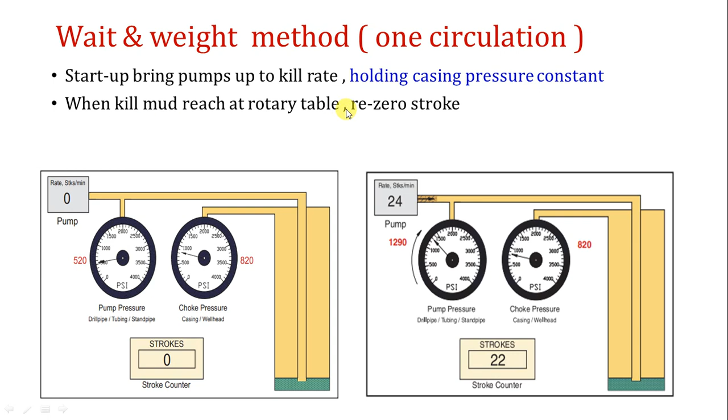When the kill mud reaches the rotary table, you have to make a re-zero stroke. Why? Because if you didn't make a re-zero stroke after the surface lines, you will pump volume - for example the drill pipe volume - but some of the kill mud volume is consumed in the surface lines. So at the bit, you would think the killing mud has reached the bit, while exactly it is not at the bit, it is above it. So that you will not get the accurate FCP, it will be much more than required, which may lead to a problem like fracturing the formation or something like that. So it is very, very important, and that is why when the kill mud reaches the rotary table, you have to make a re-zero stroke.

Now for wait and weight, how will we kill the well? As I told you, in the kill sheet you will see the schedule that we have made, and I told you it will be used in the wait and weight method. The schedule is from ICP until the FCP. It's called the schedule step down, the step down in pressure schedule. This means every 100 strokes, for example, there is 50 psi or something like this, but it has to be calculated from the kill sheet. Keep in mind that this schedule is only used until the kill mud reaches the drill pipe, until the mud reaches the bit of the drill pipe. After this, take this paper and put it in the trash - it has no meaning at this time. So the only use of this schedule is while the kill mud is pumped through the drill pipe until it reaches the bit. But once it reaches the bit, this paper is taken to the nearest trash basket - we will never use it again.

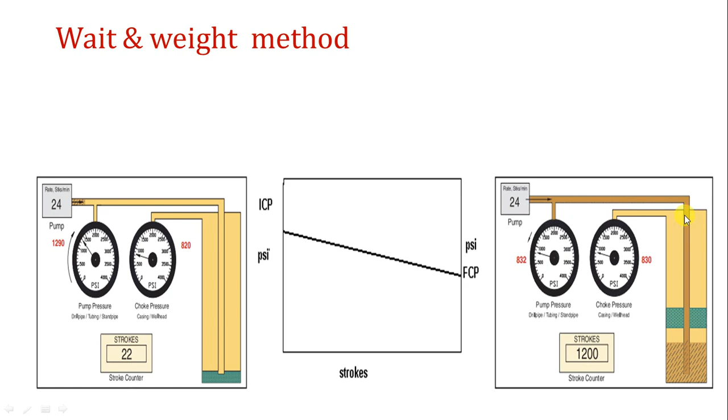Okay, so now let's check. Once up to speed, we reach the kill rate. Here we reach the ICP. Here is the ICP.

The actual ICP here will be reduced as per the schedule that allows the drill pipe pressure to drop from ICP, or initial circulating pressure, to the final circulating pressure as kill mud is pumped to the bit, using the drill pipe step-down pressure schedule.

After this, take this paper and throw it in the nearest trash basket.

As you see, it was here 1290, for example, but here it reaches 832. So this means it makes steps, as you see here, steps.

But what about casing pressure? You don't have any reading about it. Don't care about its reading. It was here 820, here 830 - no problem, but it will increase because of the expansion of the gases here. The gas has been expanded, so it will increase, but don't care about its reading now.

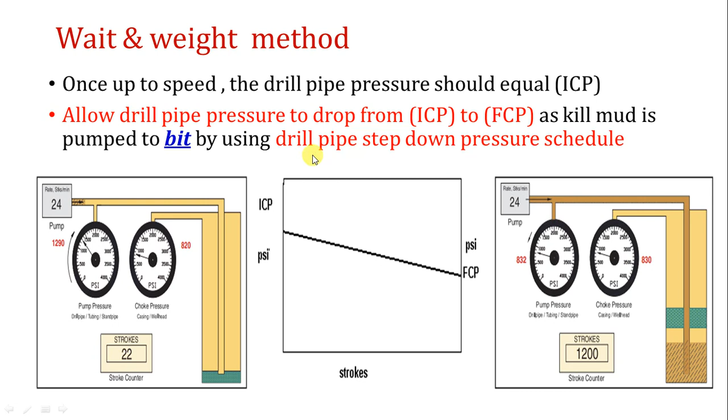Now, after the mud reaches the bit, here there are three phases in the annulus: the old mud, the gas, and the kill mud. But there is one phase of mud, called the kill mud, in the drill pipe.

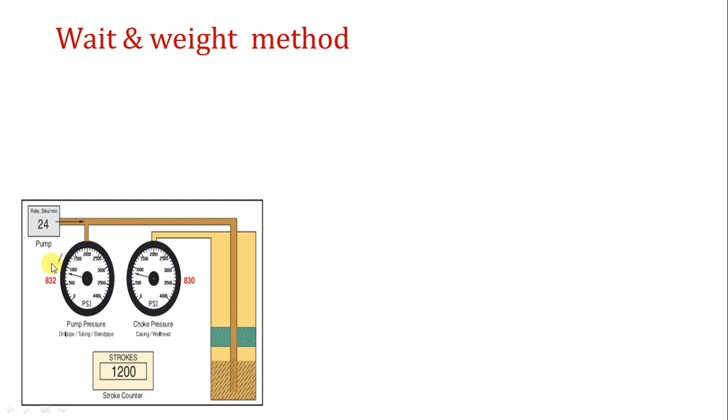So once you reach the FCP and the kill mud reaches the bit, hold the drill pipe pressure to be constant until finishing the killing of the well. Hold the drill pipe pressure to be constant. So with the kill mud at the bit, hold the drill pipe pressure constant, which is at the FCP, until kill mud returns at surface.

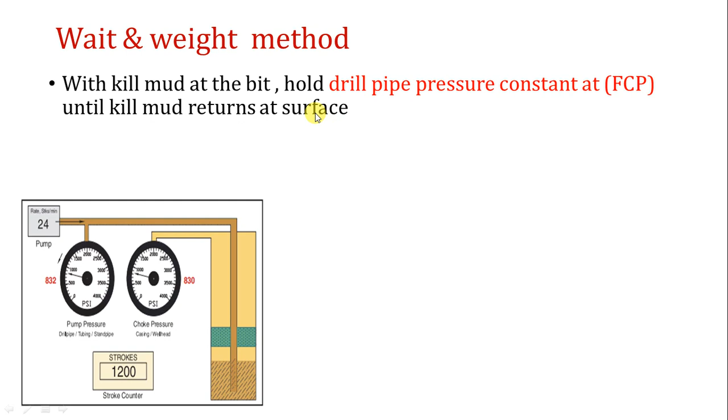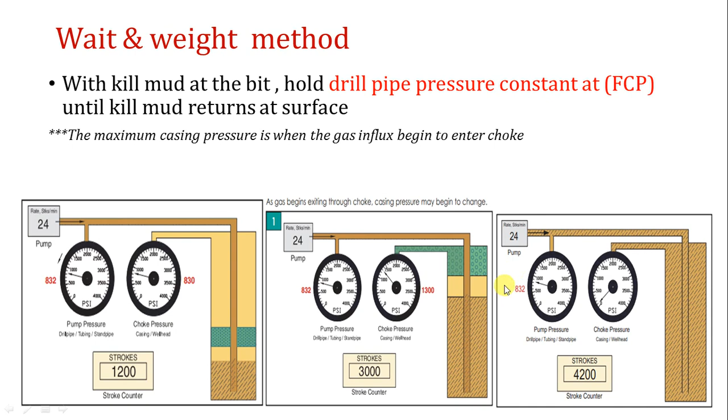Don't pay attention also to the casing pressure. The maximum casing pressure is when the gas influx reaches the surface or enters the choke - it's the same meaning. Keep pumping, holding drill pipe pressure, until all the mud is displaced from the annulus.

Now you can pump extra strokes with the kill mud to be circulated, then shut down the pump. After shutting down the pump, you will see that both gauges are zero.

If, for example, you see a difference from zero, it may be one of two things: maybe you get a second kick, or maybe there is some trapped pressure. If it's trapped pressure, bleed for example 50 psi and check if the pressure increases or not, then bleed another 50 and check again. If it's trapped pressure, it will never increase. But if you get a second kick, it will increase, so you can increase the mud weight and kill the well for the second time.

So keep in mind, now we have killed the well and all pressures here are zero and zero here, so the well is killed.

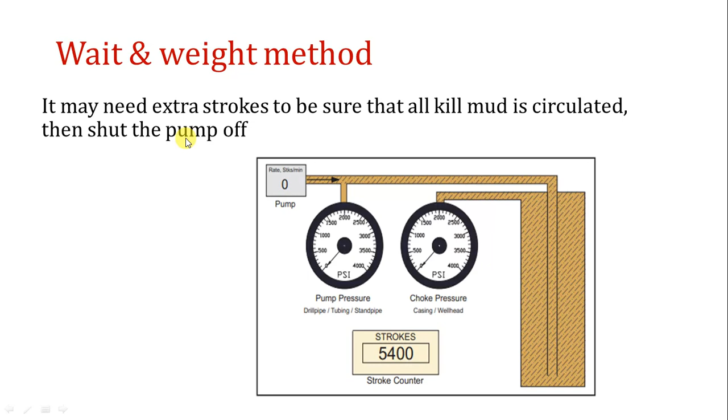Now we will go to some notes, and these notes are very important - all of them are questions in the IWCF and WellSharp exams. It comes up too much in the equations in the IWCF exam: pumping kill mud and gas behavior.

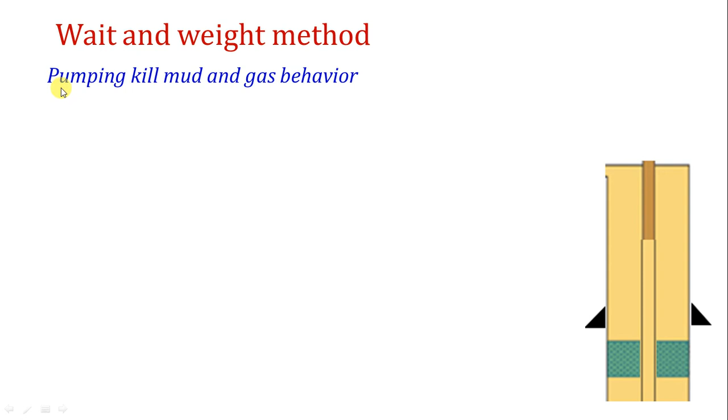The kill fluid fills the drill string while gas is circulating up in the annulus. While pumping, the kill mud is inside the drill pipe, and at the same time the gas is circulating up, but it is in the open hole. So how about the drill pipe pressure, the casing pressure, and the shoe pressure?

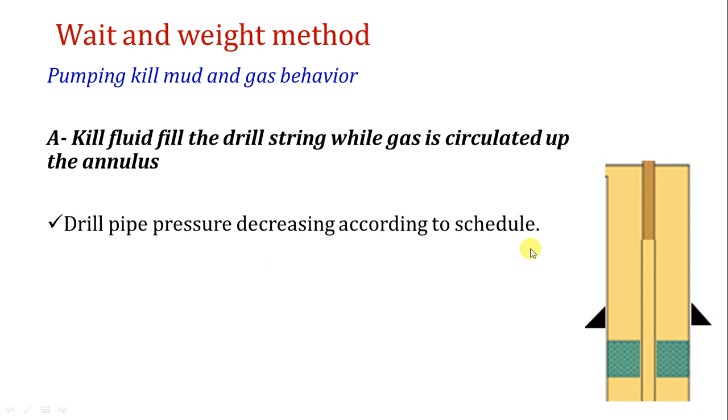As I told you yesterday, we will make a comparison for the three pressures. The drill pipe pressure will decrease according to the schedule from ICP until the FCP. So this is very important.

Number two: what about the casing pressure? Casing pressure will keep increasing due to gas expansion. Number three: what about the shoe? The shoe pressure will be increasing according to the gas expansion, with the same value as the casing pressure, and reaches its maximum value when the top of the gas influx reaches the shoe.

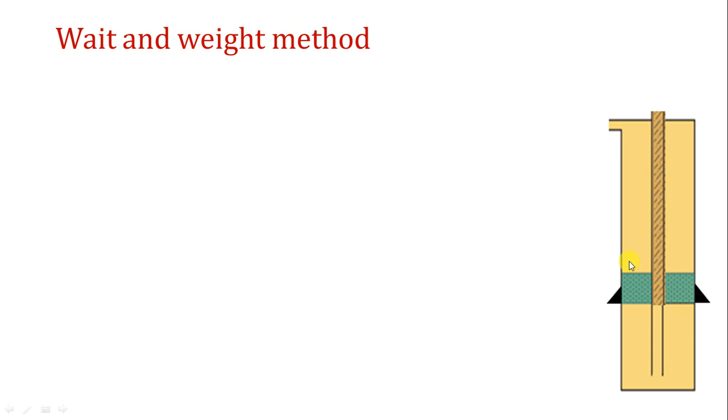Number two: while pumping, the kill mud weight is still in the drill pipe, but the gas has passed or is passing through the shoe. The kill fluid is in the drill string while gas is circulating inside the casing or passing through the shoe.

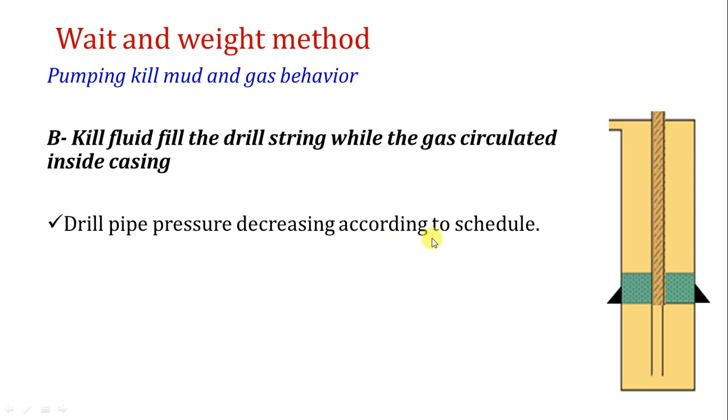What about the drill pipe pressure here? It continues to decrease from initial circulating pressure until final circulating pressure, according to the schedule. What about the casing pressure? The casing pressure will continue to increase, due to the gas expansion.

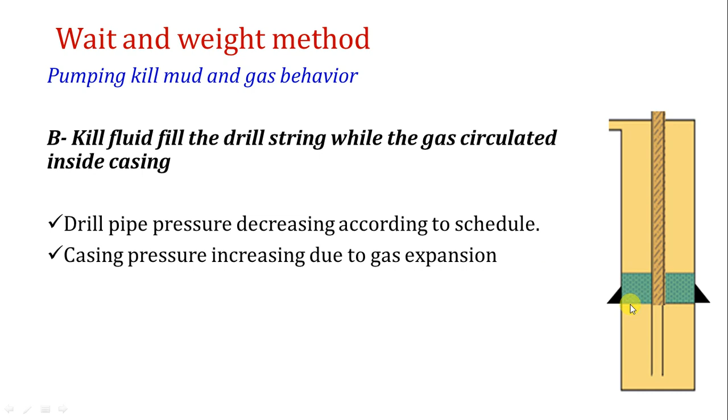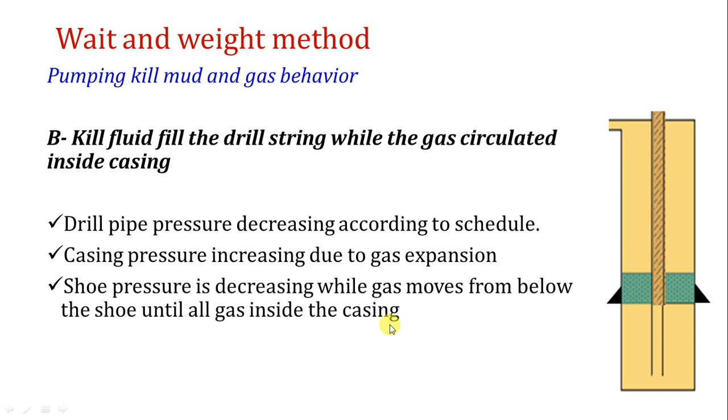What about the shoe here? As the gas is passing through, not passed - we are in present simple tense, not past tense. In the present tense, that means the shoe pressure will become decreasing. So the shoe pressure is decreasing while gas moves from below to the shoe until all gas is inside the casing.

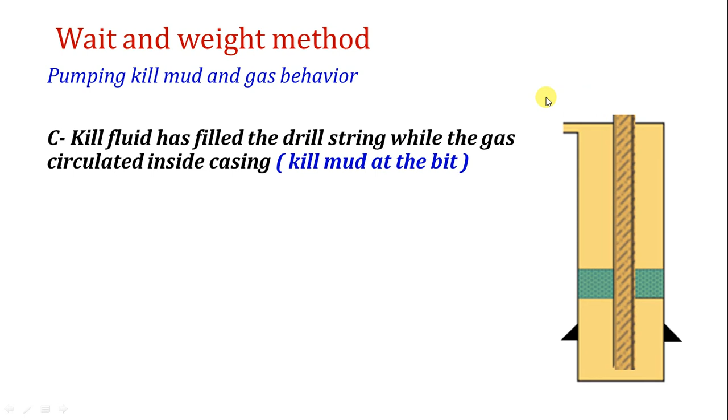Number three: when the kill mud reaches the bit. Here, the kill fluid is filling the drill string and reaches the bit. What about the drill pipe pressure? It has to be kept constant at the final circulating pressure. So the drill pipe pressure is kept constant with the final constant circulating pressure.

So here there is a question: if the kill mud reaches the bit and you keep casing pressure constant, actually the gas is expanding, so the casing pressure is increasing. If you kept it constant, this means you open the choke. This means you will decrease bottom hole pressure and may get a second kick. So the drill pipe pressure is kept constant, and the casing pressure is increasing due to gas expansion.

What about the casing, the shoe pressure here? The shoe here already is one phase around the shoe. Here there is one phase, so it is kept constant also - the shoe pressure remains constant.

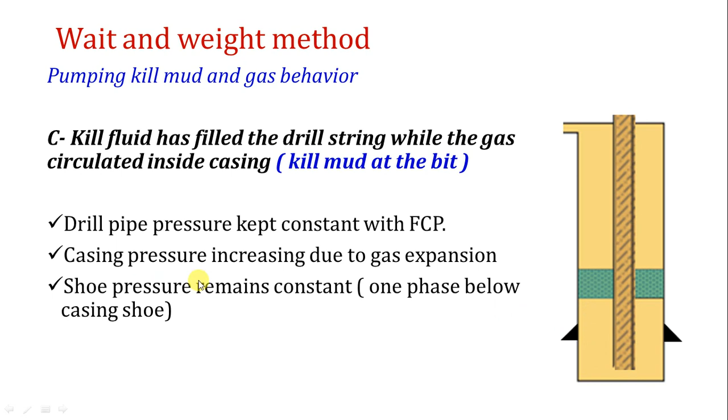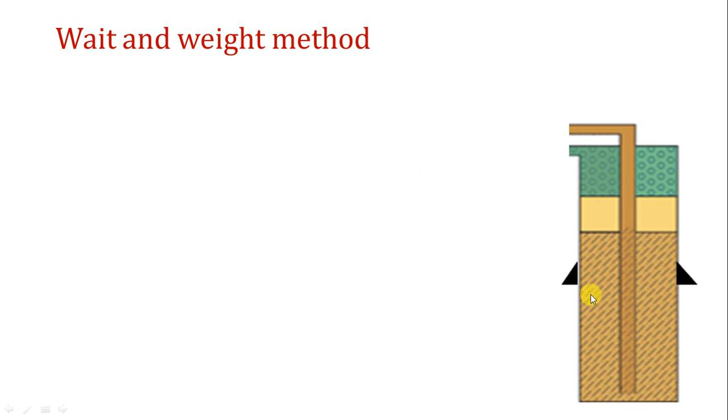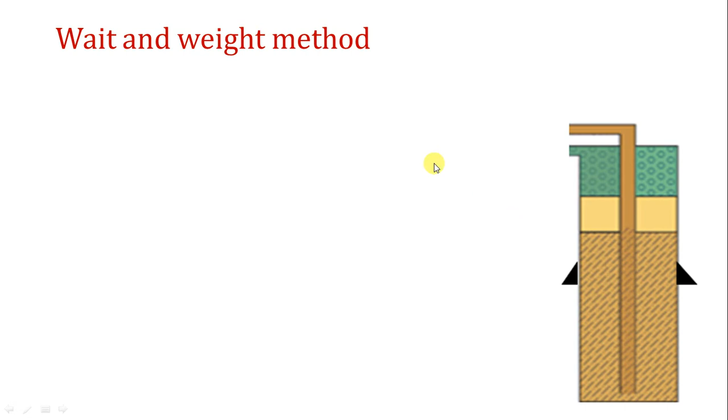What about if the kill mud is pumped through the open hole and reaches and passes the shoe, as you see here - okay, past the shoe. So what about the pump pressure, the drill pipe pressure here? It has to be kept constant with the final FCP. There is no problem about it.

What about the casing pressure? Actually, here there are three phases: kill mud, original mud, and gas. So actually the casing pressure will keep increasing due to gas expansion, but not as before. It will keep increasing, but with little increments. Before, the increase was exponential. So now the casing pressure will keep increasing due to gas expansion, but at a slower rate, because the kill mud is displacing the original mud.

What about the shoe? The shoe here there was a pressure with original mud, with little mud weight, but now there is kill mud with higher mud weight, so it will be decreasing. It will be decreasing as the kill fluid moves up the annulus to the shoe, then remains constant after this. So it will be decreasing until the kill mud passes the shoe, and after this it will be constant.

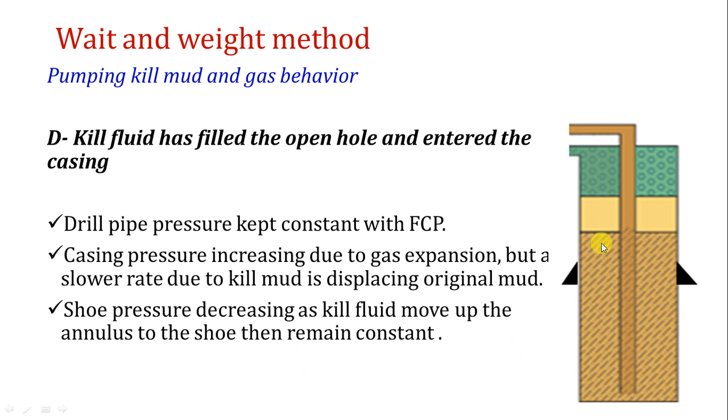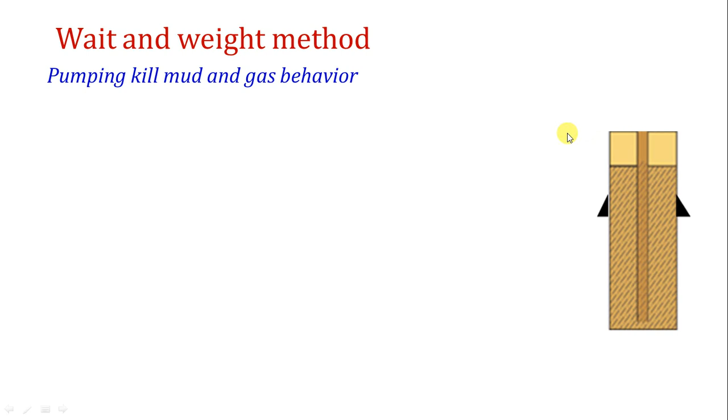Now, after all the gas has been displaced - what if the kill fluid has displaced all gas out of the hole, but there is still original mud here. So the drill pipe pressure is kept constant at FCP. The casing pressure will be decreasing after the gas is displaced out of the hole, and the shoe will be kept constant, remaining at the same value as before, because there is one phase next to the shoe.

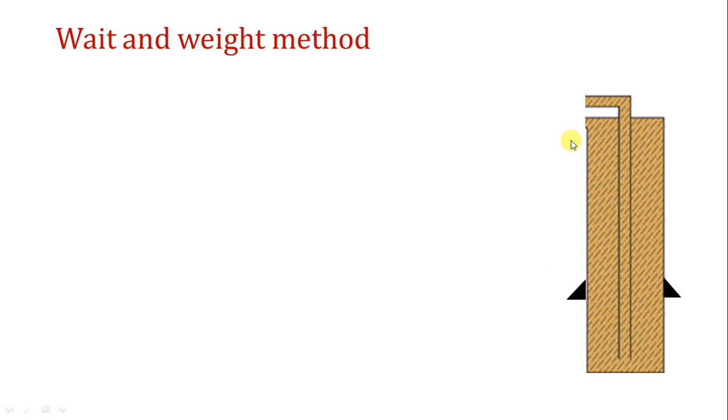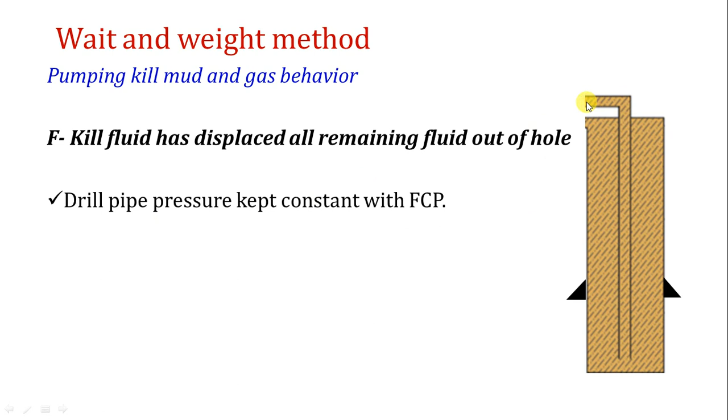Final one: when all the mud is displaced, when all the kill mud is displaced, the kill fluid has displaced all remaining fluid out of the hole. So the drill pipe pressure will be kept constant at FCP. The casing pressure will decrease until it becomes zero, and the shoe pressure will be kept constant with the same value as before.

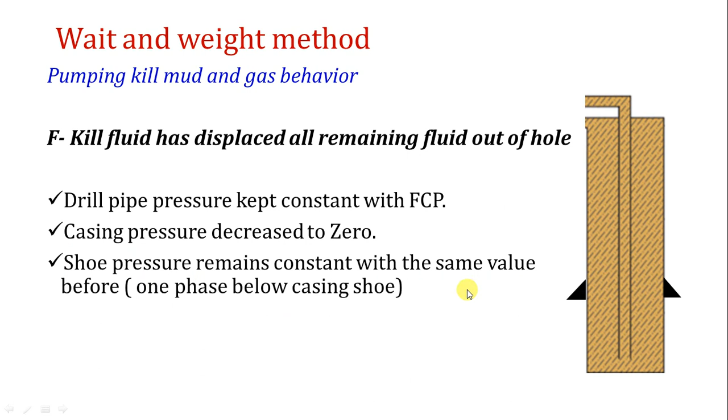All of these notes are very important. Now we will go to some important notes.

Following a choke adjustment, the drill pipe pressure gauge takes longer time to restore due to the length of the drill stem. What is this called? It's called the response time or the lag time - it's 1000 feet traveled each second. This is a very important question I have already asked in the well schematic. So you have to keep in mind it's called response time or lag time.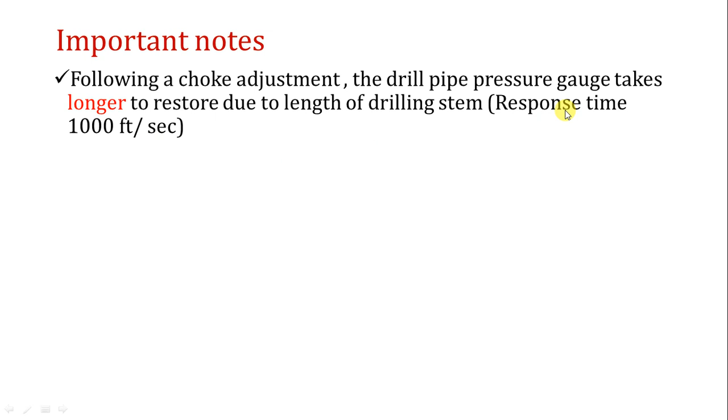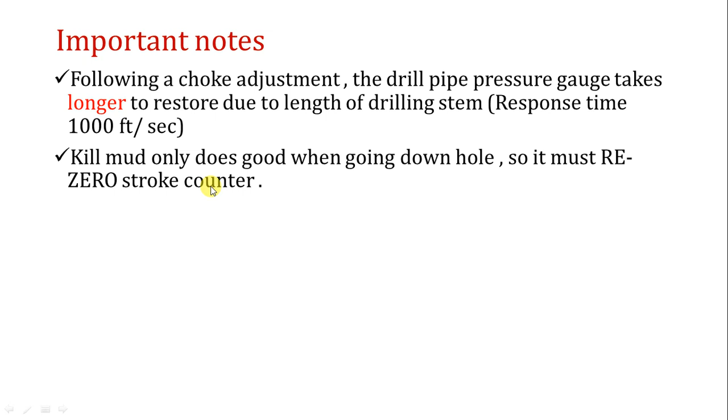Number two: the kill mud only does good when going down the hole, so it must re-zero the stroke counter. As I told you, if you don't zero the stroke counter, you will have a problem because the total drill pipe string doesn't have enough kill mud and the pressure reading will not be accurate.

Calculate initial circulating pressure - it's only a guideline. So there is a very important question.

If the driller came to kill the well and his relief didn't hand over properly, he shut the well to the last reading and has to establish killing the well. What will he do? He will start up the pump, holding casing pressure constant until reaching the kill rate. Once he's at the kill rate, this is the actual ICP. He has to take this actual ICP at the start up, which means when you reach the kill rate. From zero rate to kill rate, hold casing pressure constant. This is a very important note.

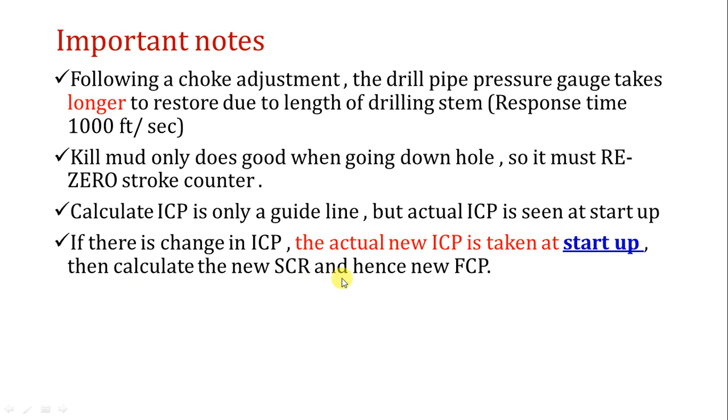If there is a change in the ICP due to anything, for example while killing the well the bit nozzle has washed out or plugged, the pressure will increase. At this time, you have to shut down the pump and shut in the well, and discuss the situation, what happened. After this, you start again killing with the new ICP and new FCP. This is very important: if there is a change in ICP due to any reason, the actual new ICP is taken after start up of the pump, then calculate the new SCR and hence the new FCP. This is also asked in the IWCF exams.

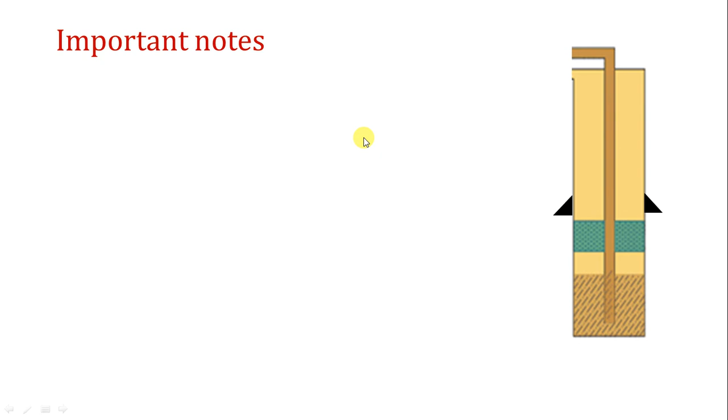If the open hole volume is more than the drill string volume, which method is better to use? If the drill string volume is less than the open hole volume, the wait and weight method is better and will result in lower casing shoe pressure more quickly than the driller method, so it is preferred. This is a very important question: when do we prefer wait and weight over the driller method? When the drill string volume is less than the open hole volume. If the string volume is more than the open hole volume, there is no difference between the two methods.

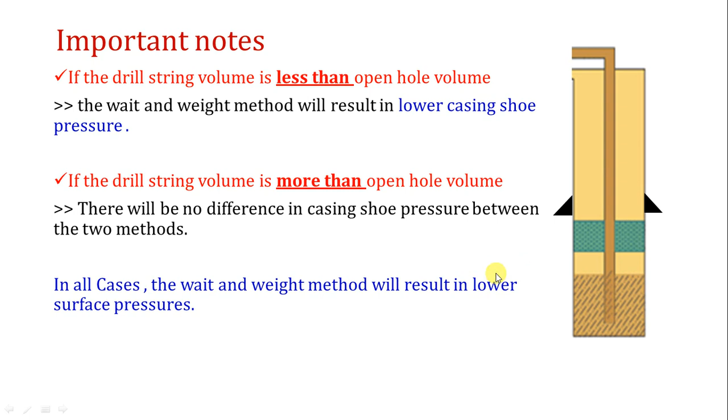In all cases, the wait and weight method will result in lower casing shoe pressure and lower surface pressures than the driller method. Here is a comparison of the killing methods we have talked about before.

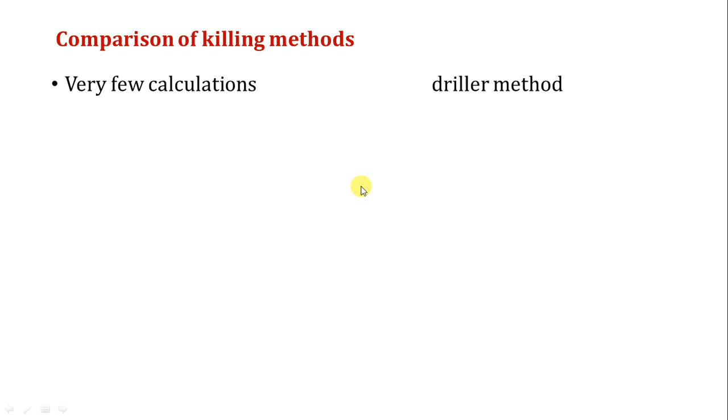If you need something with few calculations, or even if you haven't made calculations yet, you have to use the driller method, because it is just one circulation - circulating with the original mud until you make your calculations and prepare the kill mud. It's the simplest to teach and understand. This is the driller method. It also reduces sticking and gas migration.

There was a question asked in IWCF: if the well has flow and is shut in, but the mud engineer tells you that the barite or weighting agent is not enough on the rig and the truck or boat will come after 3 or 4 days, at this time will you stay until the gas migrates, or is it better to use a particular method? Which method is preferred here? Actually, the driller method is best because you have to displace the influx from the well and keep the shut-in casing pressure equal to the shut-in drill pipe pressure for up to 10 days. There's no problem because there will never be any migration of gases, so there's no risk of fracturing the formation or similar issues. So to reduce sticking and gas migration, you have to use the driller method.

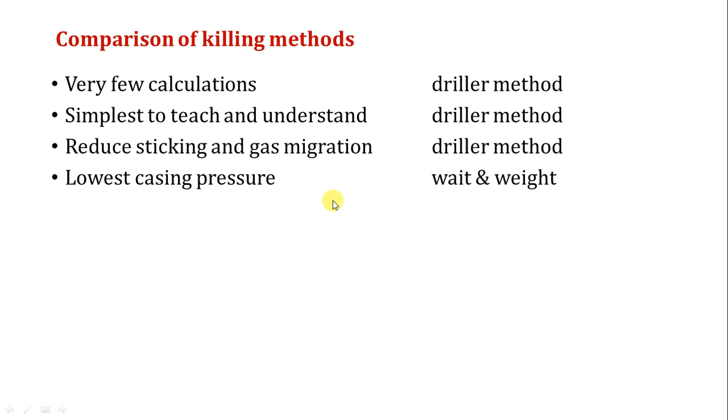This is very important: the lowest casing pressure is with wait and weight, as I discussed. The lowest casing shoe pressure is also with wait and weight. Less loss of circulation is also with wait and weight, as I told you, because of the lower pressures and reduced gas migration. Shortest circulation time: here there is one circulation, but in the driller method there are two circulations, so the shortest circulation time is wait and weight.

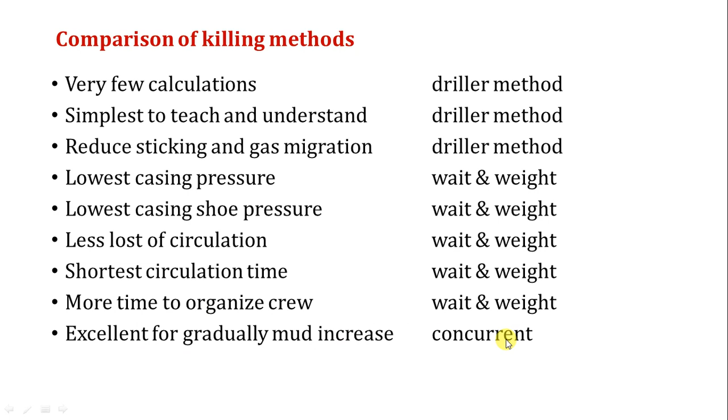It takes more time to organize the crew and prepare the mud, so the wait and weight method requires that. Excellent for gradual mud increase - this is the concurrent method, and inshallah we will talk about it later. Today we have discussed another method to kill the well.

I hope this video is informative for you and I hope it appeals to you, inshallah.